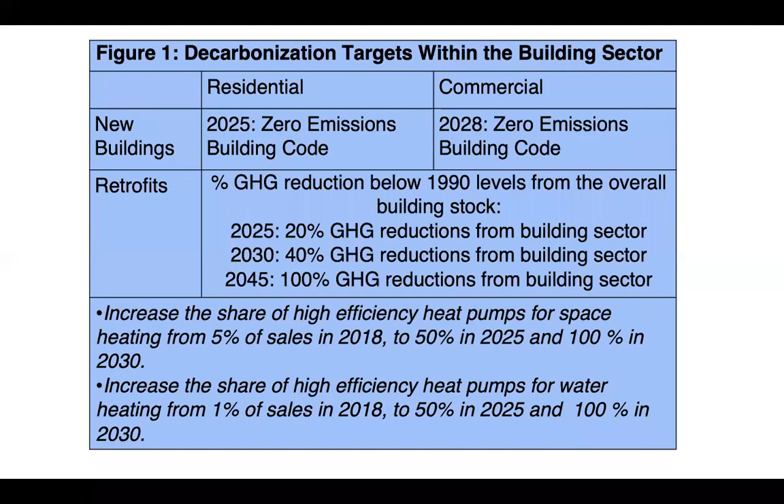Out of that roadmap, we adopted 5 major goals we'll have to follow to achieve this. We have to significantly increase awareness around building electrification and its benefits. We need to make sure customers are receiving good value, both from upfront costs and the ongoing use of electrification technologies.

We need to make sure builders and contractors have a value proposition—they're making at least as much, if not more, money installing electric equipment rather than natural gas. And we need to work with supply chains and manufacturers to reduce and remove barriers and get them up to speed to significantly ramp up.

Lastly, we need to align all of our state and local policies to meet these goals, and that's where this webinar comes in. Out of these goals, the Building Decarbonization Coalition does a number of different initiatives and activities. One of them is webinars like this, which fall under how do we work together to affect change on policies to align them with our decarbonization goals in the state.

I want to bring up a few upcoming events the coalition is going to host. We're having a Grid Integrating Buildings 2-day summit in Oakland, November 12th and 13th, where we'll dig into electrical panels and panel upgrade needs, as well as the impact of building electrification on the electrical distribution network at the neighborhood level. We'll have 2 fantastic days with some of the thought leaders and practitioners in this space delving into the problems and emerging solutions.

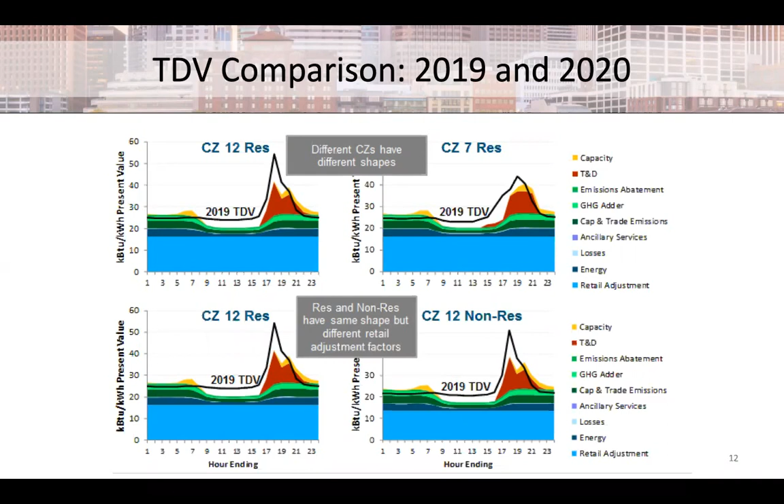Go to the next slide, please. Beneath this TDV metric and the source energy metric there are many assumptions and inputs. I wanted to share a few of those - there's lots more, so we're not going to get into all of them, but here are the key things that are really influencing these metrics.

The first thing to flag is that the CEC has added new weather files to reflect global warming in the 2022 performance software, so we'll see what effect that has on the code. Second, they added a new input for the global warming potential of refrigerant leakage in heat pumps and ACs, as well as methane leakage from the gas system. Third, they assumed a decarbonization goal of 80% GHG reduction below 1990 levels by 2050.

All these inputs are things we actually have an issue with, which we'll get into later in the webinar - just flagging them now. The fourth is they also assume there is renewable natural gas or decarbonized pipeline fuels in the gas system by 2030, at rather high levels - 10% biomethane by 2030, ramping up to nearly 20% by 2050, as well as renewable hydrogen blended in with fossil gas by 2050.

The next thing is they actually assume a slower building electrification scenario than we expected. They took E3's slow or low building electrification scenario, which basically assumes about 18% of homes are electrified by 2030 and about 49% by 2050. We're going to discuss in a bit why this is problematic.

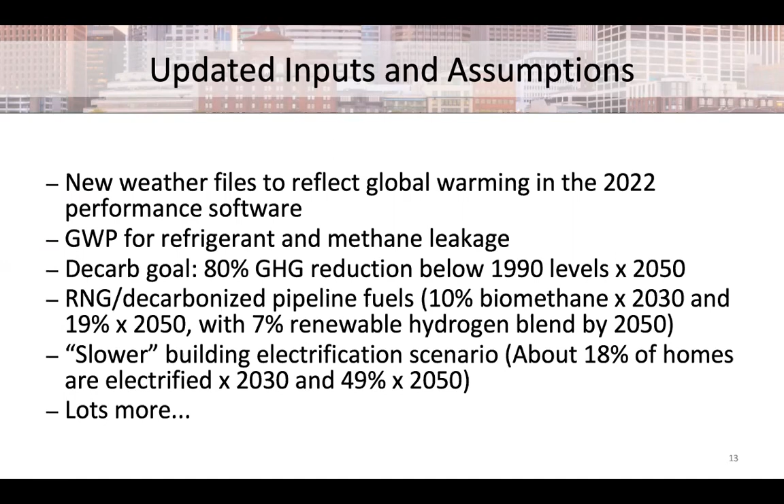Lots more inputs and assumptions. If others want to flag other things at the end of the call, that would be great as well. So with that, I'm going to turn it over to Ted to get into more of the metrics and the baseline, and then we'll come back and get into the assumptions more.

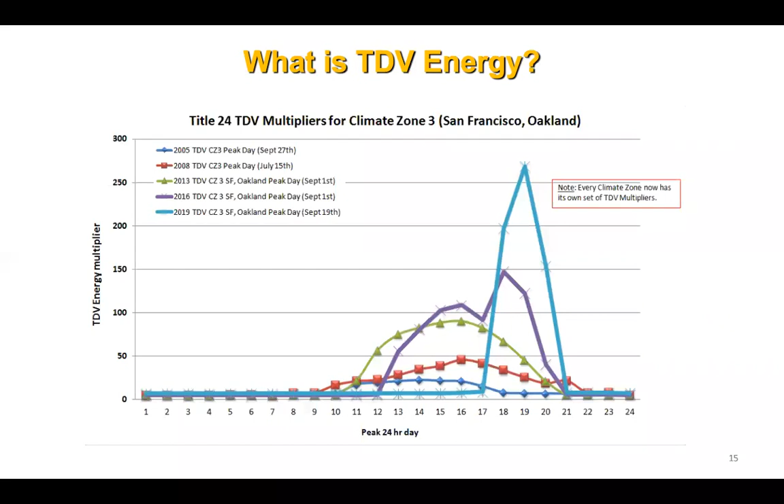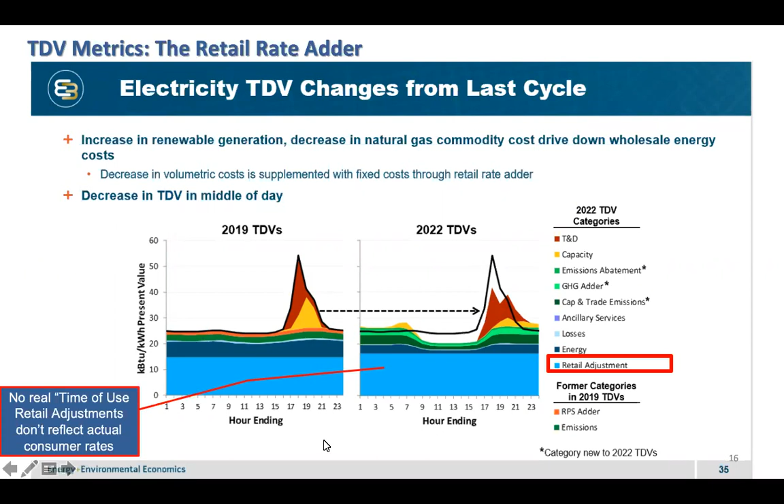Go ahead and click forward. Like we showed here, the 2019 to 2022 impacts are pretty significant in shifting the midday peak a bit lower. But if you click forward, Panama, there's this challenge with the dampening effect from the retail adjustments. This is one thing Pierre from NRDC pointed out—that there are no time-of-use retail adjustments that would impact this curve overall. And that flat adder is something we're concerned with, because it doesn't really reflect the total retail adjustment that users would see.

And if you click forward, later in the E3 study they actually identified both a seasonal and daily impact of energy use in that retail hour. So that needs to be really reflected in that flat adder, and that's something we were concerned about with the TDV metric and that flat rate adder—it really just dampens the effect of the TDV multiplier in the daytime.

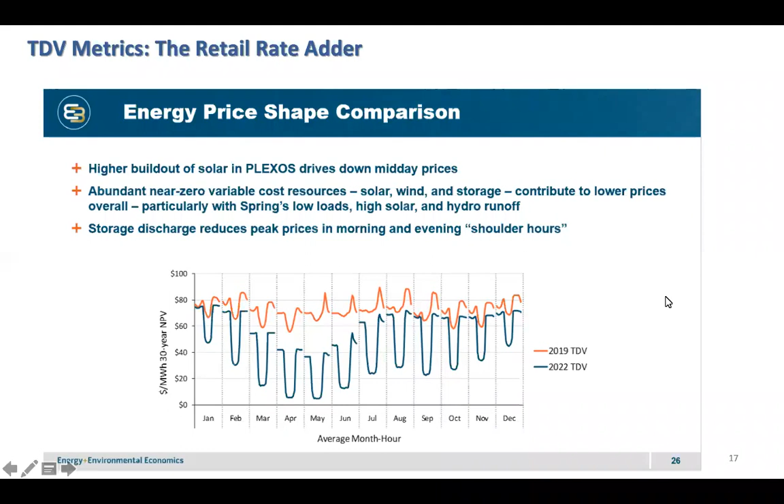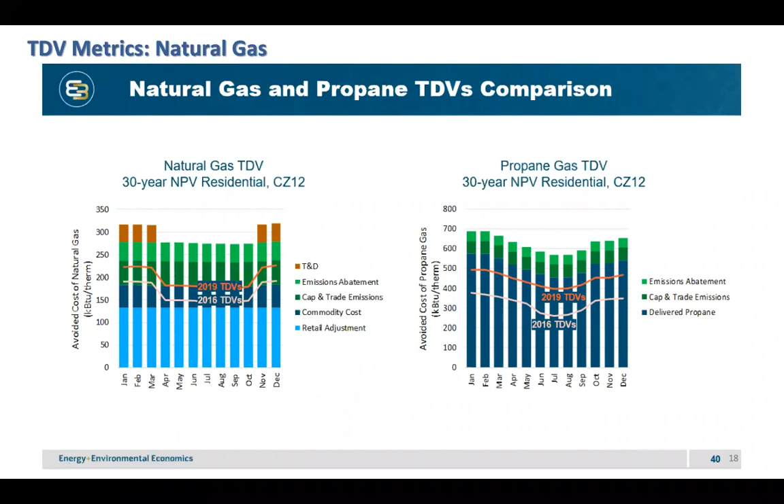So let's talk about the new metric. There's an alternative metric called time-dependent source energy. We need to be really careful about the metrics we use here to get out of that preemption issue. The way they've done this is to use source energy, but on an hourly basis. And when you really match these up, it reflects the carbon impacts pretty closely.

What E3 is showing here is that they've actually taken the short-run source energy profile and combined it with the renewable energy profiles, based on our progression of renewable portfolio standards—progressions towards more renewables on the grid. So they've combined these factors into this long-range source energy multiplier that will predict out the greening of the grid, and the hourly impact still for time-dependent source. This is actually a really good, positive metric that will take into account, over this code cycle, some of the progression of renewable energy coming onto the grid. So go ahead and click forward.

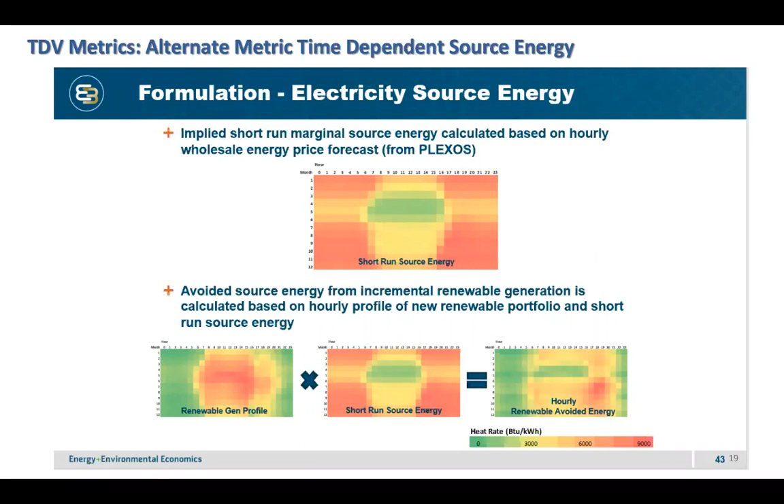And that kind of gives you another look into this. So these source energy multipliers in the middle of the day, in the middle of the year where we've got solar access, you can see that time-dependent source energy factor recognizes the availability of solar on the grid. And then in those later seasons, going into December, January, out in those colder hours, we recognize that we still have a lot of carbon sources accounted for in that metric. So that will give us an hourly window into those source energy and carbon impacts.

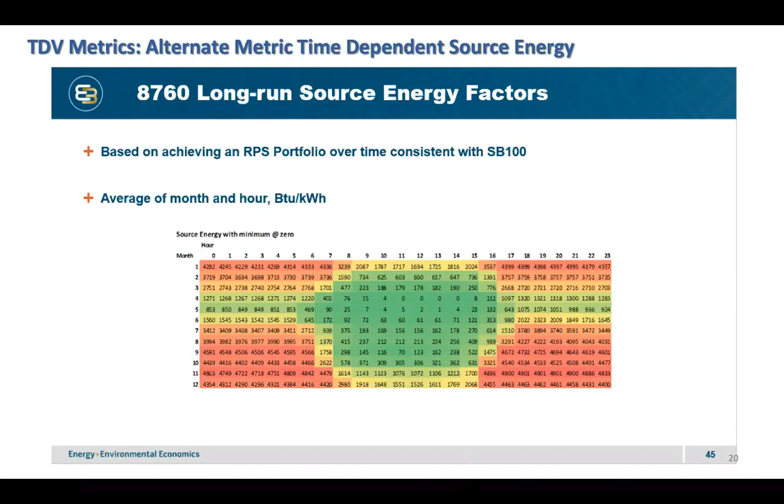The challenge being that in the retail natural gas projections, that time-dependent source on the gas side actually does include a significant amount of biogas, almost the maximum potential of biogas going out to the 2049-2050 period. So they're taking into account a zero global warming potential, or CO2e, for the blended biogas and hydrogen over time. And that is, I personally believe, kind of the theoretical maximum that we can achieve, which is a challenge, I believe.

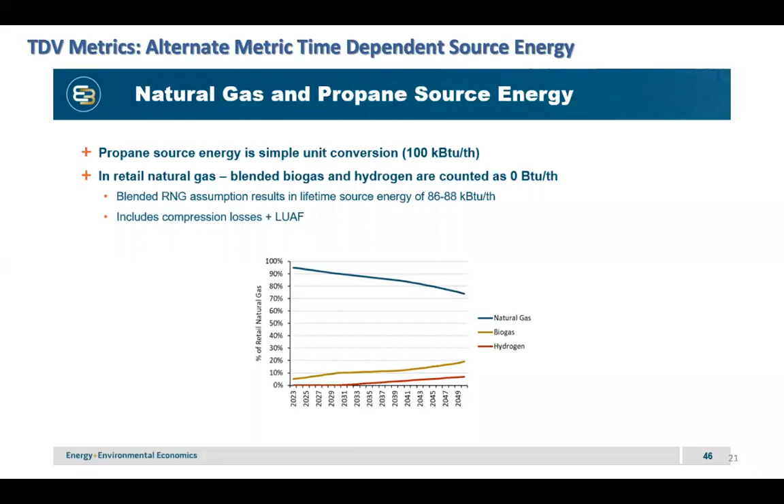So this does take into account some leakage in the natural gas system and what gets into the transmission and distribution system, and some behind-the-meter leakage as well. This doesn't really account for what we're flaring off in methane production and gas production, say, in the western states right now. This is really just talking about the leakage within the delivery system, not the full source impact of fuel production and methane delivery.

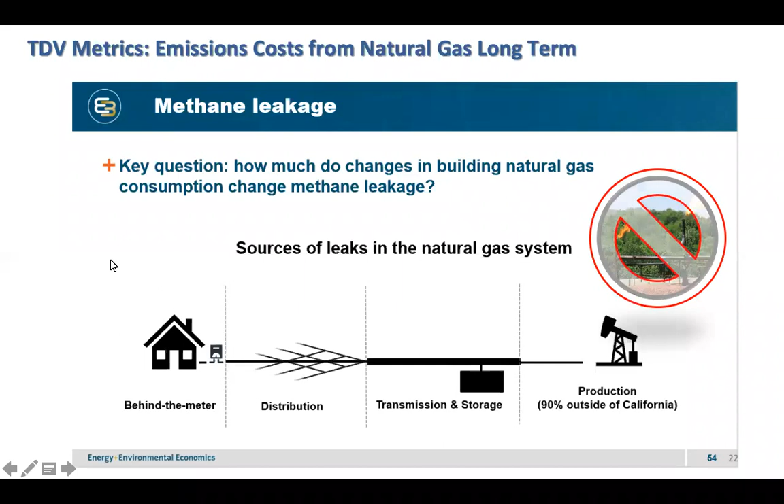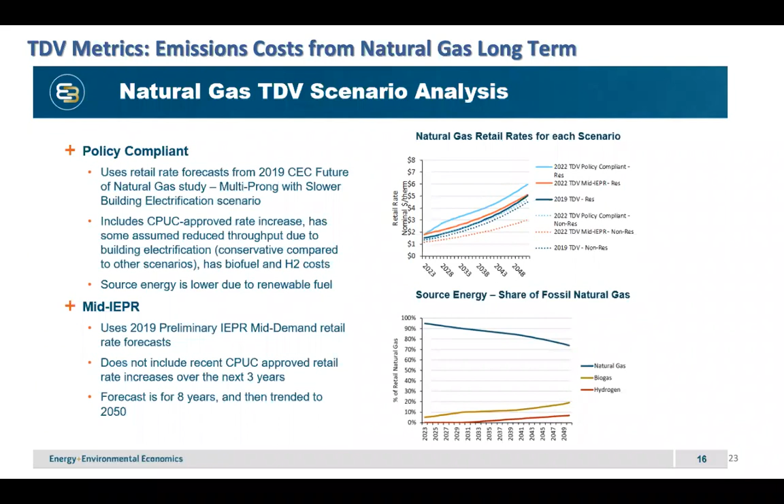Again, looking at the mid-IEPR applications, we do have that full source energy down to 80%. In other words, accounting for 20% of both biogas and hydrogen coming into that delivery. Again, just one more metric that E3 put out, showing that reduction of natural gas, that credit they're getting, almost towards 20% of the biofuels.

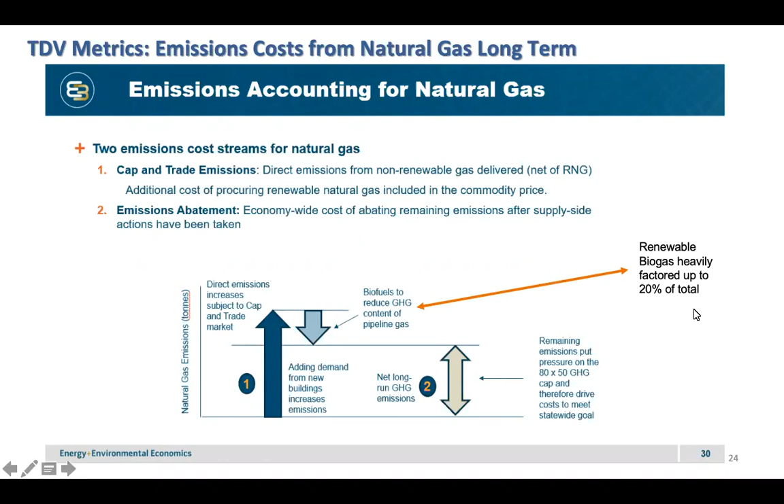And one more time. So the leakage rates—and I think Rachel's going to talk about this a little bit more further on—they're assuming that 0.7 leakage rate, and we have a firm understanding that there is a lot more leakage in the system that we need to be accounting for in that.

So the 2022 standards assume separate gas and electric baselines, as the 2019 code does for residential buildings. This matters because we've got a fuel-neutral baseline for low-rise residential and multifamily low-rise residential buildings. That time-dependent source metric and the TDV metrics are compared equally, so if you've got an electrified building, you're getting compared to an electrified building. The challenge right now is this is not planned to happen on the non-residential side of the equation. And that standard gas baseline that we get compared to is really handed down to ASHRAE 90.1 alignment.

So we need to recommend to the CEC that they do introduce a fuel-neutral baseline, either by overriding the ASHRAE 90.1 system mapping or inventing their own, to give us a fair electrification baseline, so that the effectiveness of the time-dependent valuation metric and the time-dependent source metric gets compared back equally to your fuel choice, at least for the interim.

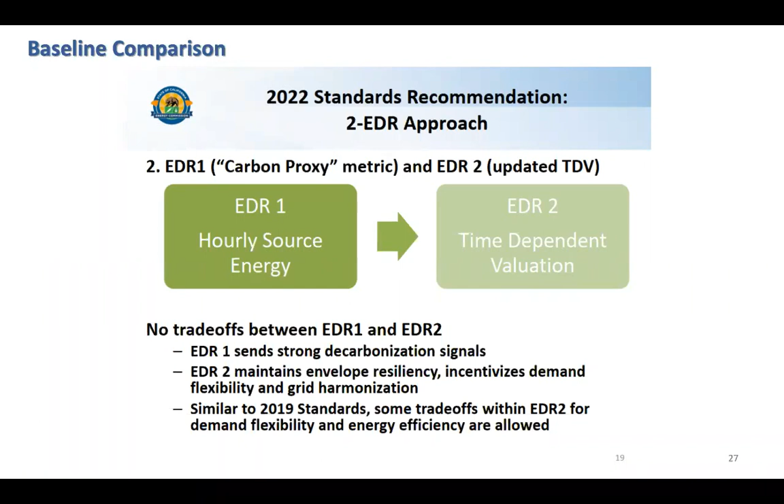So again, we're talking about that EDR1, which is hourly source energy, and EDR2 being time-dependent valuation. Currently, they're showing no trade-off between that, which is fine for the fuel-neutral baseline in the residential and low-rise residential. But if we can't show compliance on time-dependent valuation versus a gas baseline on the non-residential side, we're not going to be able to show compliance, period.

And just to remind everybody, we've got a lot of these issues coming through right now because of these code comparisons for non-residential buildings for our local REACH code adoption. And this is happening for UC as well, as they have their decarbonization policy already put in place. So this is an issue for non-residential buildings. Residential buildings we have a good solution for, and I personally want to encourage the Energy Commission to do that same good work for the non-residential buildings.

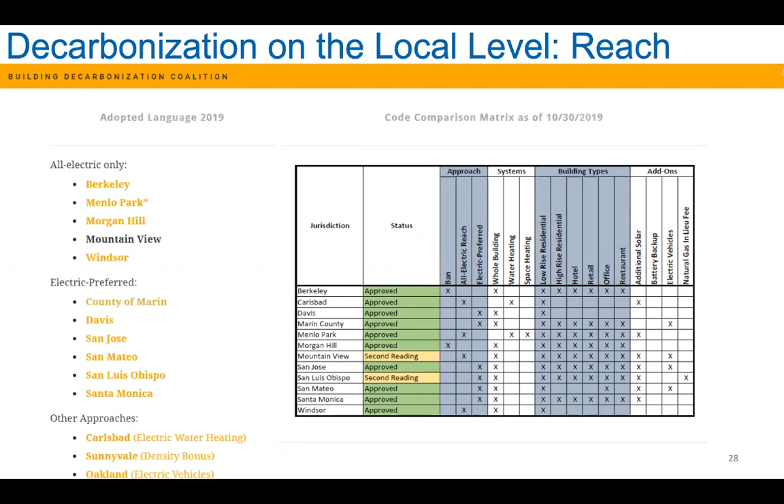Great, thank you, Ted. And I'm going to talk about five other areas where we think the 2022 code can be improved in terms of the assumptions that impact both TDV and the source energy metric. So those five key areas are the assumptions around climate targets, the assumed building electrification scenario, the assumed amount of the supply of RNG in the pipeline, the methane leakage rates, and then the global warming potential of refrigerants and heat pump appliances. Let's go to the next slide. So the first is the climate target.

The 2022 standards assume a very old climate target of 80% GHG reduction by 2050. This does not reflect the executive order that Brown instated last year at the Global Climate Action Summit of carbon neutrality economy-wide by 2045. This climate target also doesn't reflect IPCC or climate science. So it's important that if our goal is decarbonization, that we have the right decarbonization target, and that we're all working towards the same goal.

This also impacts TDV and the price signal for electrification. So we encourage you to ask the CEC to update their climate target to reflect the carbon neutrality goal for 2045. Next slide, please.

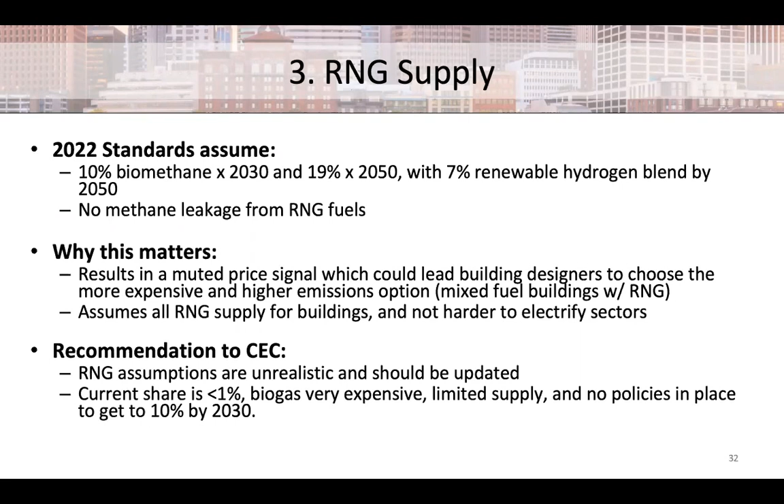Just want to point out also that the current share is less than 1%. Biogas is very expensive, there's limited supply, and there's also no policies in place that are going to get us anywhere near 10% by 2030. So those are things to keep in mind.

The next is on methane leakage, which Ted also touched on as well. I would say this is definitely the Sierra Club's perspective - I'm not sure if this is the BDC perspective as a whole. So let's have a discussion on this. First, the 2022 standards assume that methane has a 100-year global warming potential of 25.

Many other organizations and experts assume a 20-year GWP of 86, so that's something to discuss. They also assume a very low leakage rate of 0.7%, which they do to align with CARB.

This is even lower than the federal EPA's leakage rate of 1.5%, which is already quite low. And then, as I mentioned, they assume no leakage for RNG. This is important because it impacts the TDV metric and the source energy metric, which trigger code compliance or not. So our recommendation to the CEC is that the 2022 standards should align with climate science and not just other agencies that are slow to update their assumptions.

We believe we should use a shorter time frame for methane because it's only in the atmosphere for 12 years. So the 20-year global warming potential of 86 will be much better than the 100-year global warming potential of 25.

There's also a range of studies out there on what the actual methane leakage rate is. One that's been very accepted is the Alvarez EDF study from last year, showing about 2.3% methane leakage. I note that this 2.3% leakage is all before the meter. There are recent studies by LBNL of behind-the-meter leakage of around 0.5%. So this could potentially be added together to around 2.8%. But we know it needs to be at least 1.5%, or much greater than that—not 0.7%.

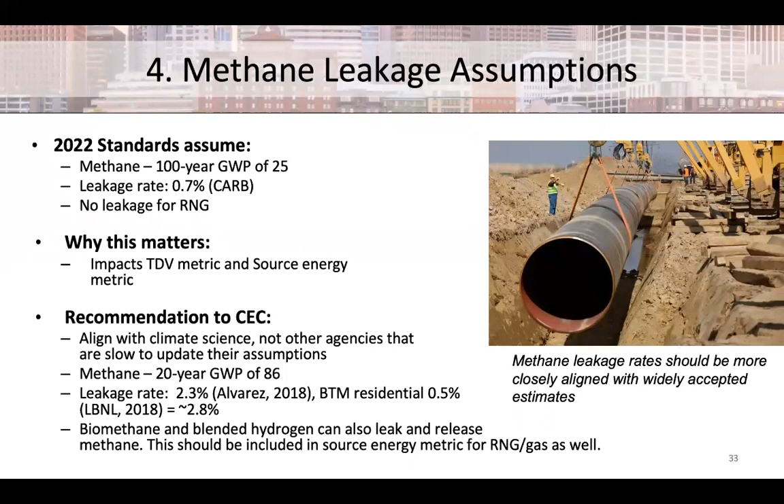And then the last point is around refrigerant global warming potential assumptions. The 2022 standards assume a very high refrigerant global warming potential—you can see that in the first chart. And it is good that they're including this, because it impacts the greenhouse gas emissions.

The concern is that the CEC does not seem to be including lower GWP refrigerant alternatives, including heat pump models that may have a GWP of 1 if they use CO2 as a refrigerant. So we're concerned this poses a risk of inflating the greenhouse gas emissions of all-electric when we know the market for low GWP heat pumps is quickly evolving, and there are policies in place to help bring these lower GWP heat pumps to market.

So our recommendation to the CEC is that their assumptions should really include this technological innovation and market transformation we're going to see, and have the GWP of these appliances decline over the life of the building, rather than assume these higher refrigerant GWP appliances will be in the building for its entire lifetime. We need to take into account all the policies, both international and state protocols, and all the work being done to transform the market toward these lower GWP heat pump appliances.

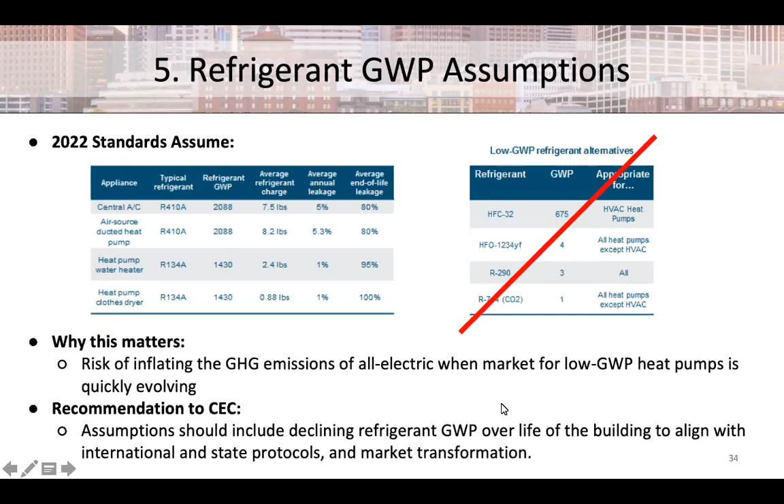And I think that's all of my slides. Pamela, do you want to do next steps, or would you like me to? Yep, yeah, I'll be happy to.

Great, so thank you both very much, Ted and Rachel. Really, really well done—a lot of material in a short amount of time, and I really appreciate it.